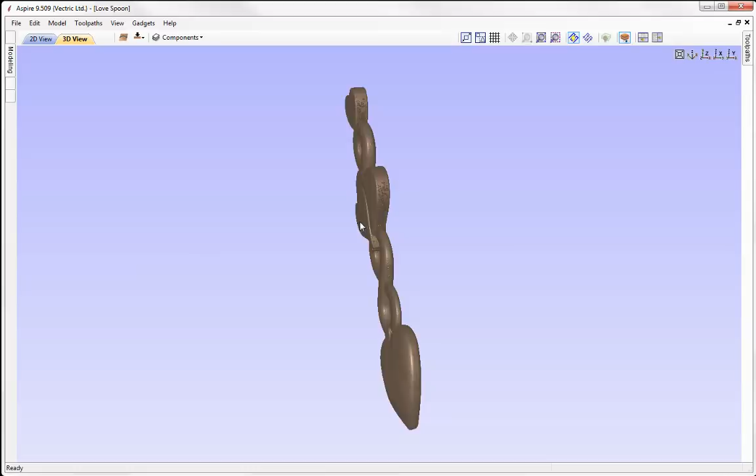In this tutorial, I'm going to show you how to create the vectors, model and toolpath this pretty love spoon. The love spoon is a really nice gift to give to someone, whether that be for Valentine's Day, anniversaries, or as wedding gifts. The idea is that these are actually wall hanging decorations. I'm also going to show you how you can personalize them by applying some V-carved text to either side of the spoon, just to give it that more of a personalized touch.

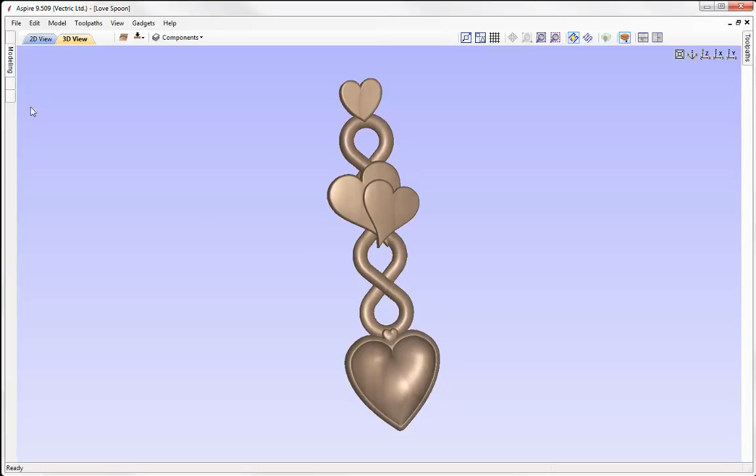Let's go to File, Close, and select to create a new file. Here we need to specify our job type. As we're creating a two-sided part, we're going to use the double-sided job type. I need to put in a width, so I'm going to go with 3.5 inches for the width and a height of 13 inches, and the material thickness that I'm working with is very precise here, it's 0.94.

I'm going to set my Z0 position off the material surface for the top side, and then for the bottom side I'd like to zero off the same face, so I'm going to set the second side to be off the machine bed. XY position, lower left, flip direction, I'm going to flip that from left to right, and then the modelling resolution, I want to work with a very high modelling resolution there, and then we could go ahead and press OK.

So the first thing that we're going to do is draw the heart bowl shape part of the spoon. For this I'm going to switch on the Smart Snap option. That will help me draw my heart shape, as it will enable me to snap to various points within my job. Now I'm only going to draw one half of the heart because I want to make it symmetrical, so to make my life easier I'm just going to worry about one half.

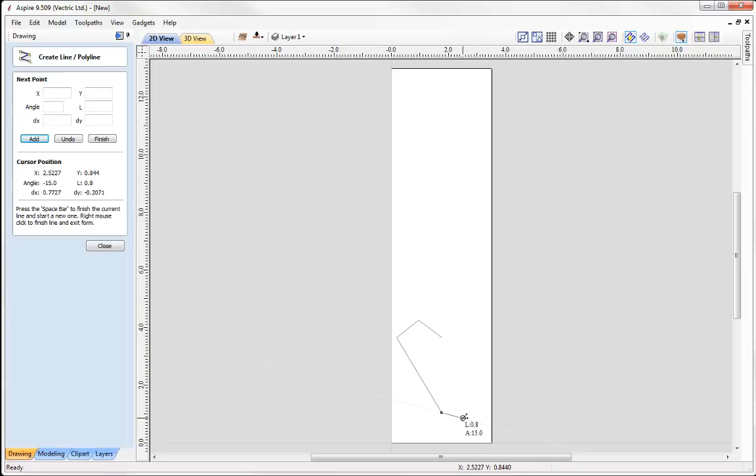Once I've got that perfect, then I can then mirror it over to the right hand side and join the two vectors together. So let's go ahead and use the polyline tool. I'm going to snap to the centre line that runs through here, click to begin my point, and then come up somewhere around here, click to enter that point. Then I'd like to make my next point in line horizontally with our first original point, and go somewhere around here, click to enter that in, and then basically snap back to our centre line somewhere around here, click to enter that in, right click to come out of the polyline tool, and there is the left side of my heart.

So now we need to basically smooth those corners. To do that, we're going to put that into node edit mode. I'm just going to right click over this node here and say smooth point, right click over this node here and also use the option to smooth the point. Zooming in with the scroller of my mouse, I'm just going to adjust the handles on our nodes to really transform the shape of our curve.

So for this handle here, I'm just going to line that up vertically like so, and just drop that down a little. This node here, I'm just going to bring that in, and then take that handle and just using my up arrow key, send that up. And this one here, I'm just going to bring that round. I'm going to take that node and maybe bring that down. Really all this is about is just tweaking with the handles until you're happy with the curvature that you have.

Okay, so I quite like what we've got there, so I'm going to put that in normal selection mode, and I'm going to take that vector and then we're going to use the mirror option here. We're going to flip about the job center, create a mirrored copy, and we'll flip that horizontal, close that out, shift and select the other side, and then we're just going to join those two vectors using the most common point option here, and so now we have one closed vector. With that vector, what I'd like to do is create an offset going outwards.

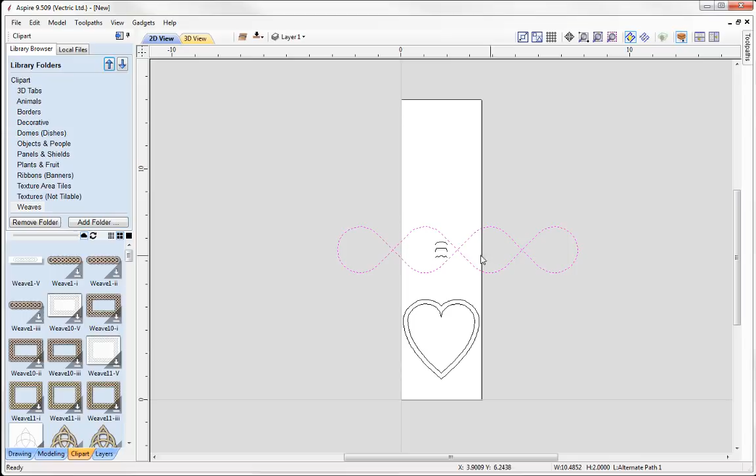Okay, now in this case I don't want these ones, I don't want this one, and I'm just going to go and find the weave that I'm after. Okay, it's not this one. Okay, that's the one that I want. So it's this weave that I want, and we're just going to delete these cross sections. I'm only interested in this one here. I'm just going to move that out the way for now, and we'll come back to this shortly.

So with this weave, I'd like to rotate it 90 degrees. So I'm going to use the shortcut key 9 on the keyboard, and that will rotate anything in increments of 45 degrees. I'm going to press F9 to snap that to the centre.

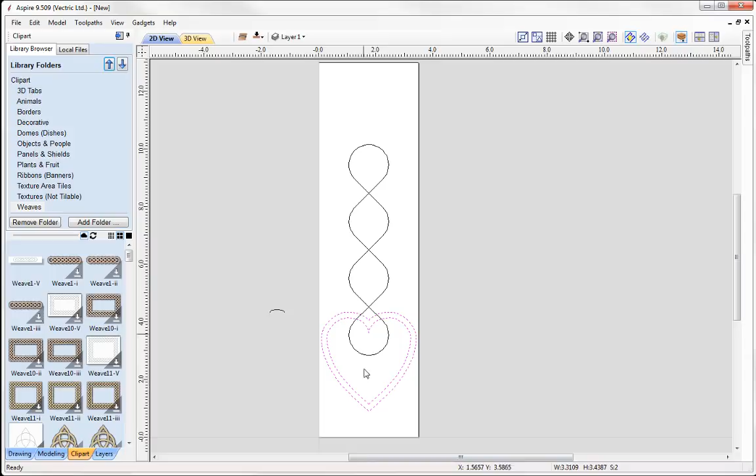Then what I'm going to do is just shrink it down a little. So putting it into transform mode by selecting it again, hold down Shift on one of the corners and then simply drag that down. I'm just going to select the heart vectors and move them down my job. They didn't need to be that high. Okay, and then I can take that weave and look at bringing that up like so.

Right then, so I think I like the position of the weave, how we've got it here. So now let's take a look at this cross section. Let's just zoom in a little. Okay, so you can see our cross section here. What I'd like to do is just increase the height of the cross section.

So let's go into the drawing tab, into node edit, and what I'm going to do here is take the bottom nodes like so, and just using the arrow keys, drop those down a little. And then I'd like to take the top nodes up here and just bring that in, to make this a little bit more rounded. And then we'll introduce the handles on the sides there and just nudge those up also.

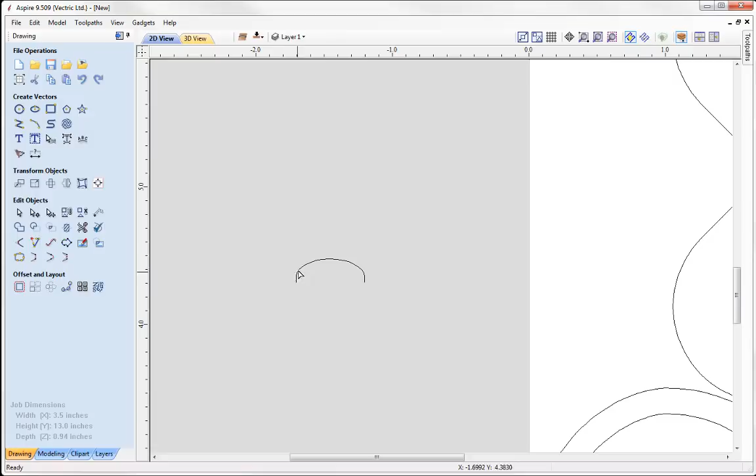Okay, so I think that's okay. It's going to give us a nice rounded part when we come to extrude this cross section around this weave vector, and it will all make sense when we come to actually model the part.

So now I'm going to add in one more vector to really complete the vector side of this modelling project. Going over to the clip art tab, I'm going to go into the 2D vectors folder.

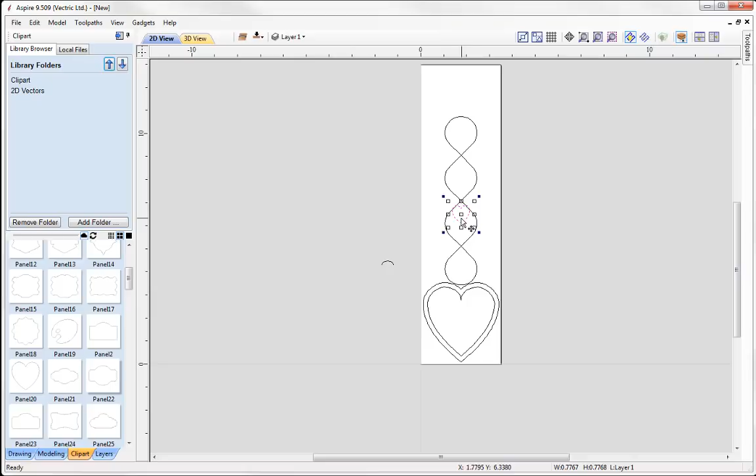You can see I have a series of vectors that I can make use of. And here we have a heart panel 20, and if I just double click to bring that in, you can see we've got the heart here, and then basically I'm just going to go and scale this down. So I'm going to take that, Shift, scale it right down, and then I'm just going to keep that in the center. I'm just going to bring that down following that center line and kind of position that in place

like so. Now if I just zoom in, I'm going to take the weave and I'm actually just going to move it up a little bit. I might move the whole thing up actually, so I'll just bring that up a notch, and then I'm going to take that heart and I just want to make that a little bit smaller. So this is basically just going to sit in between the weave and the heart itself.

Okay, so something like this, and this is going to add just a little bit of extra detail to the spoon. Okie dokie. Right then, so if we press F to fit that to the screen, we can see we've pretty much got all of the vectors that we need. Now there is one change that I would like to make here, and that's to the outer heart shape that we've got. You can see I've got quite a point at the bottom,

and I really want to make that rounded, so I'm actually going to delete that offset, take the original heart, go back into the offset tool, but this time I'm going to untick the create sharp offset corners option. That should give us a nice rounded bottom, so offset that, and you can see it's done that there for us. It's just going to have a much smoother shape to model from. Okay, so I'm happy with that.

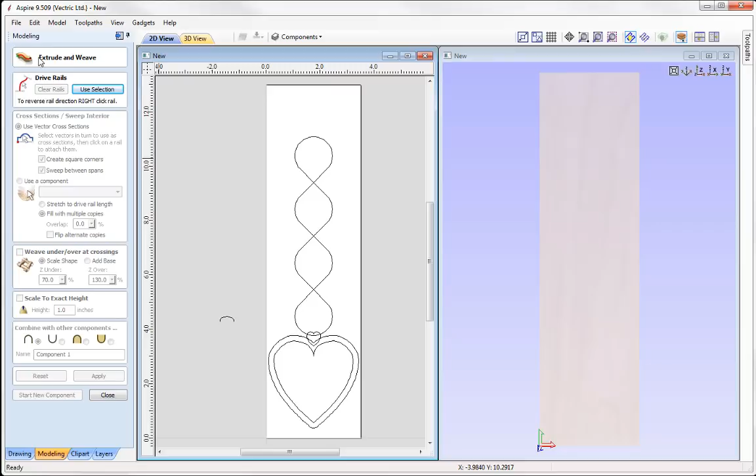So we're going to start by modelling in the weave shape for the spoon using this vector here and this vector here. And we're going to look at using this modelling tool, the Extrude Along One or More Centerline Vectors tool, commonly known as Extrude and Weave. Now this tool allows us to select a drive rail, which in this case will be this vector, where we can then extrude a cross section along the centre line of the vector that represents the rail.

And the nice thing about this tool is that where we have intersections, we can specify how we want the cross section to weave over and under by either scaling the cross section or adding a base height to the cross section. And then we can create a component that looks as though it's going under and over itself to create the weave effect. So let's select our vector for the rail, and then we'll use this option here, Use Selection.

Now we need to select our cross section, which is this vector here. So working our way down the form, we're just going to untick the Create Square Corners, and then going down we want to make sure we select this Weave Under and Over at Crossing section. So this is where we determine how we're going to weave into those intersections.

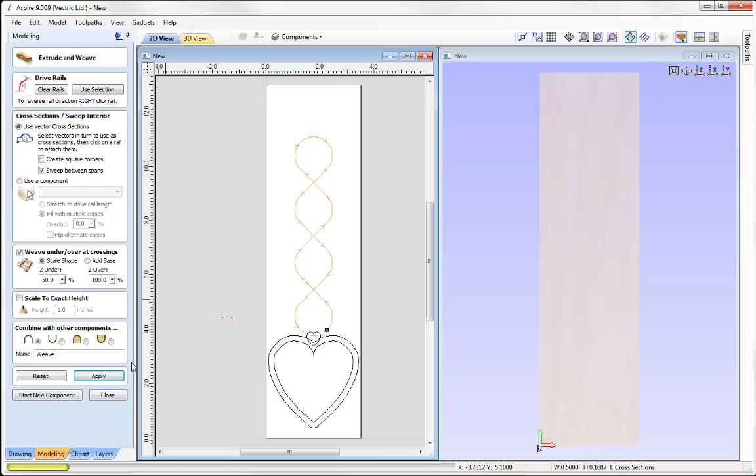Now in this case what I'd like to do is just scale the shape. Okay, so we're going to scale the shape 50% under and then 100% over. And then we could simply give that a name. We're just going to call this one simply Weave. Press Apply, and we can see that there.

So we can see how it's going under, over, under, and then back on itself. So it's a really nice tool to use to create something that looks rather complex. So put that back in Z, and then we'll just simply close out of the Extrude and Weave tool.

So now I want to look at modelling in the larger heart shape. So we're going to select that, and to do that we're going to use the Create Shape tool. Here we want to make that a curved profile. I'm going to give that an angle of 90 degrees. And in this case, what I would like to do is apply a base height here. So just going to add a little bit of a vertical height of 0.1.

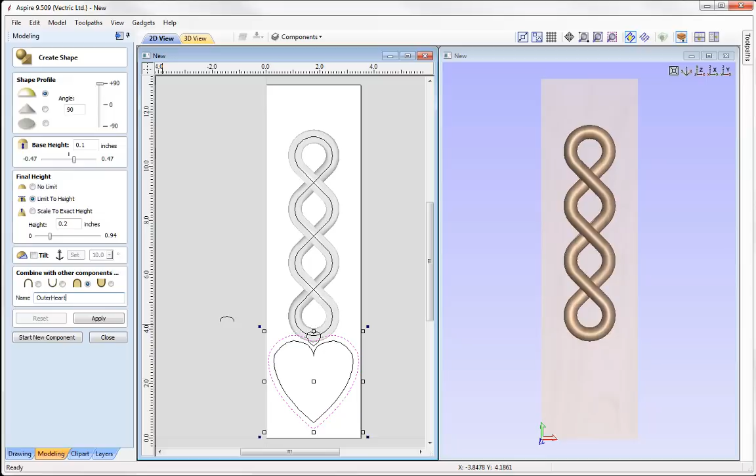I'd like to limit the height of this, and we're going to limit that to 0.2. We're going to set the combine mode of that to merge so that it blends in with our weave shape. Give that a name. We're just going to call this one outer heart, like so, and then simply press apply to see how that looks.

Okay, perfect. So you can see we've got a nice rounded edge that flattens off at the 0.3 because we've set the limit height here to 0.2. But remember, we have that base height of 0.1, which gives it a total height of 0.3. Perfect. So now what we can do is we can use this option over here to start a new component, and we can look at creating the shape for the inner heart.

So I'm going to select that vector, and this time we want to make a recessed shape within that heart. So with that vector, we're going to go with a round profile, again 90 degrees. This time we are not going to have a base height, and I'd like to scale this to an exact height. So let's just use the slider to see how a part will look. Now at the moment it's currently set to merge, so I'm going to switch that and change that to subtract so you can see how that part will look.

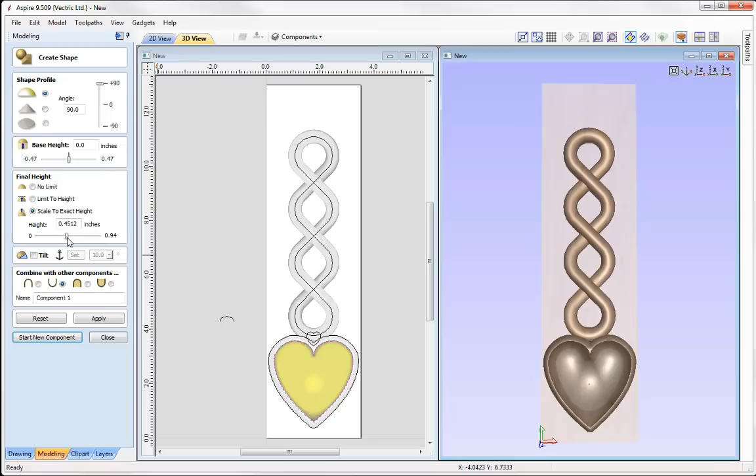Okay, so I'm just going to increase that, bring that down. Maybe just be exact here and just put in 0.4 to see how that looks. Press spacebar to enter that in, and I kind of like what we've got there, so we'll leave that as it is, and then give that a name. So we'll call this one inner heart, and then we'll press apply, and then we'll just go ahead and start a new component. And then we're going to look at this mini heart here.

So this vector over here basically serves two purposes. It's there to provide more decoration, and also just to give it more strength to this area of our spoon here. So with that vector selected, let's go into our create shape form. So we're going to go with a round profile of 90 degrees. Now I know that I'm going to need some base height to really lift that up here, so we'll come back to that shortly. We'll just see what it looks like when we come to apply various heights.

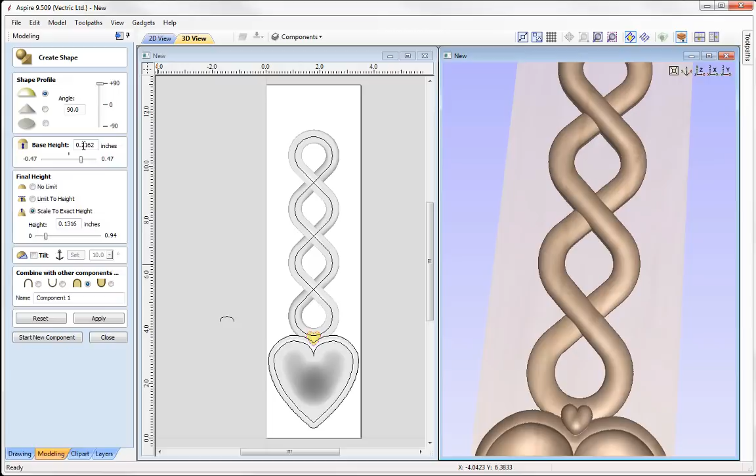So here we're just going to go with 0.4. Let's just press apply to see how it looks. Merge to add that in. Okay, so that's quite a lot of vertical height going in the centre there, so I need to really just bring that right down just to flatten it out. So at this stage I could do with adding in some base height here, so let's just bring that out. Okay, I might just want to round that up to 1/4 of an inch. Okay, so that heart's pretty much out there, but the shape itself I feel could do with flattening off.

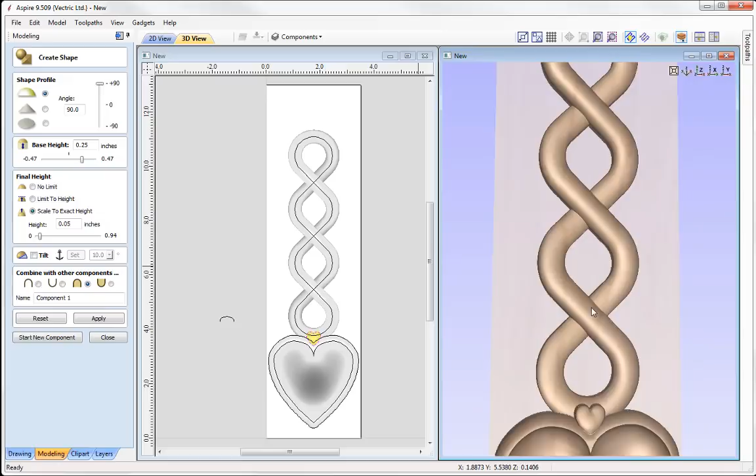So let's just go to scale to an exact height, and we'll just go say 0.05. Okay, so it's got a nice flat shape there, and that looks okay. Perfect. So we'll put that in Z, and then we'll give that a name, and we're just going to call this one mini heart, and then we could go ahead, press apply, close out, and we're pretty much done with the vectors that we've got there.

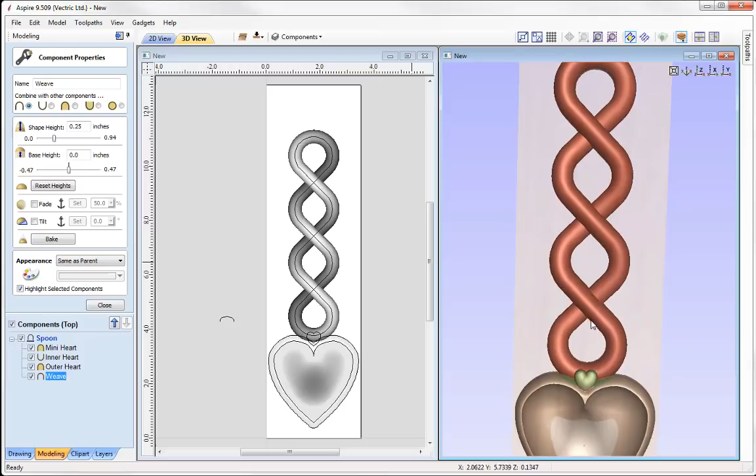So one thing that I'd like to do is just increase the shape height of our weave. So I'm going to select that component, we're going to go into the properties. I'm just going to take this up to 1/4 of an inch. Press space to enter that in, and you can see it's really bulked that out, but we still have retained the actual weave intersections there. Okay, so that's much better. I think we've got more thickness to that, so that's perfect. Right then, we'll put it in Z, and then we'll just close out here.

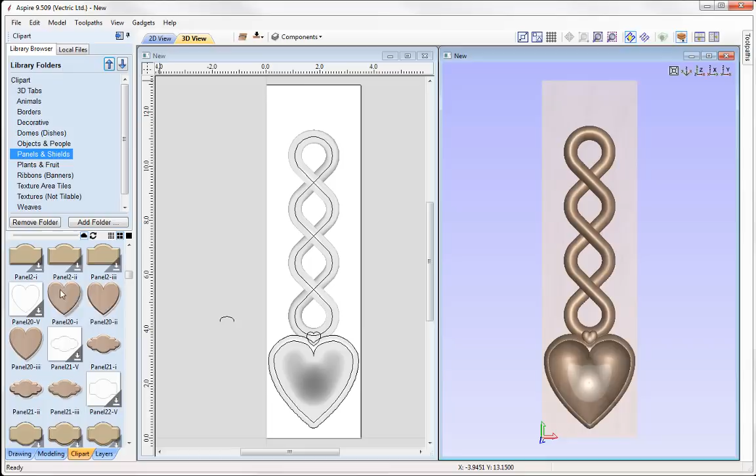So now what we're going to do is we're going to look at adding decoration to the spoon by making use of some of the free clip art that we have. So let's head over to the clip art tab. So in the clip art folder, I know that within the panels and shields section I have a panel that is a heart shape. So we've got 3 different shapes there, and they all have different borders. So I want to take the rounded border. I'm just going to double click to bring that into our job.

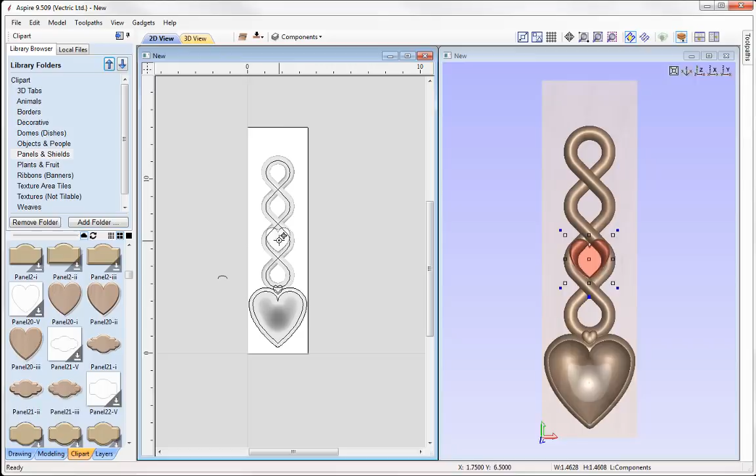And then whilst it's in transform mode, I'm going to take one of those handles, hold down shift to scale that down in proportion, and just roughly put that in place like so. So bring that down, and then I'm just going to shift that up somewhere up the top here, and maybe bring that over just like this.

So I can see in the 3D view that it's currently adding on top of our weave part of the model. So I'm just going to go and select this blue square that you can see here, and that will open up a mini properties form where I can make edits to the component whilst in the 3D view. So here we're going to set the combine mode of that to merge, and then I'm going to apply a base height here of 0.2 just to raise that up in front of our weave. Okay, so that's perfect, it's not too much, it just sits over the weave there. So I'll put that back in Z, and then we'll simply close out there.

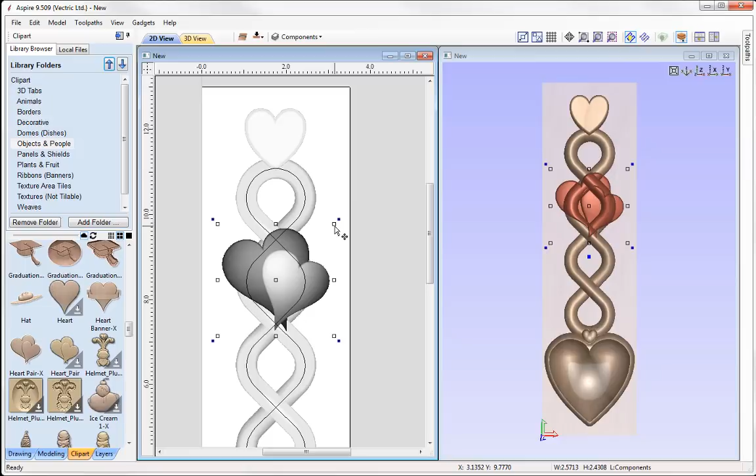And now I'm going to look at adding in one more piece of clip art to go somewhere in the centre of the weave. So here we're going to go to Objects and People, and I'm just going to scroll my way down the list until I find something that is fairly suitable. For example, this here. So I'm going to double click to bring that in. And then I'm just going to roughly scale that down, holding shift to keep that in line. And then I'm just going to position that around the top here, so somewhere like this. I might want to make that a little bit bigger, and then just bring that down like so.

And we can see it's kind of hard to see what's going on here because it's currently adding on top of the weave. So again, if we select this blue square, just move that menu out the way, set the combine mode there to merge, and then we'll look at increasing the base height to lift that up in front of the weave. So let's just go with 0.2 and space to enter that in. That doesn't look too bad. So if we just zoom in on the 3D view and then just take that component, just nudge it down ever so slightly.

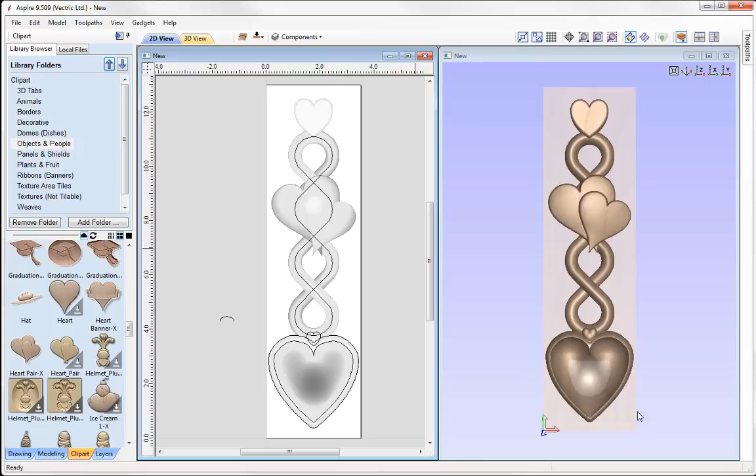Okay, so I think that's okay. Let's take a look at that from the side. Perfect. Right then, so we'll put that in Z, close that form down. In the 2D view, we'll press F just to fit that to our screen, and I'm pretty happy with the top part of the model that we've got there. And so just to finish, what I would like to do is to smooth out the heart bowl components here so that it isn't so sharp.

Okay, so you can see we've got quite a sharp edge here. So to do that, I'm going to go into my modelling tab, and I'm going to take the outer heart, shift and select the inner heart, and I'm going to group them. Okay, with them grouped, I'm going to duplicate them, and I'm just going to switch the original group off. That way I have a safe copy, and then you can also take a look at that if you wanted to take a look at some of the settings for the group itself.

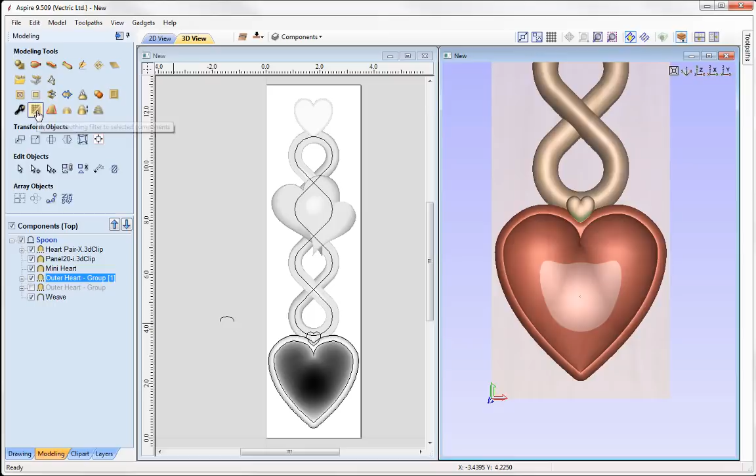So I'm just going to change a copy that we've just created here. And to smooth it, I'm just going to take that and simply use the smooth filter. It's going to warn me that it needs to be baked in order for us to process this. That's okay. I have my safe group available underneath. And here we're just going to apply a maximum smooth, and you can see there the change that happened.

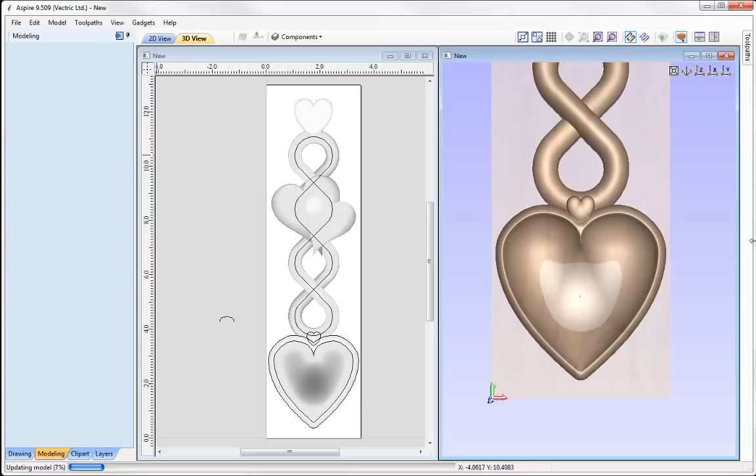If you missed it, I'm just going to go back to minimum, so that's how it was before, it's kind of sharp, and then I can maximize it, and you can see it's just really softened that spoon up. So I'm going to go ahead and press OK. We'll put that in Z, and we are pretty much done with this side. So now what we can do is look at modelling the bottom side.

So this is pretty easy because we can pretty much copy the majority of what we've created over, apart from the bowl part of the spoon, as we would need to model that because we aren't going to use the same shape. But I am going to look at copying the outer heart vector in order for us to use to create that model. So I'm going to take that vector, I'm going to right click and use the option here to copy to the other side. Then I'm going to go and select all of the components that I need.

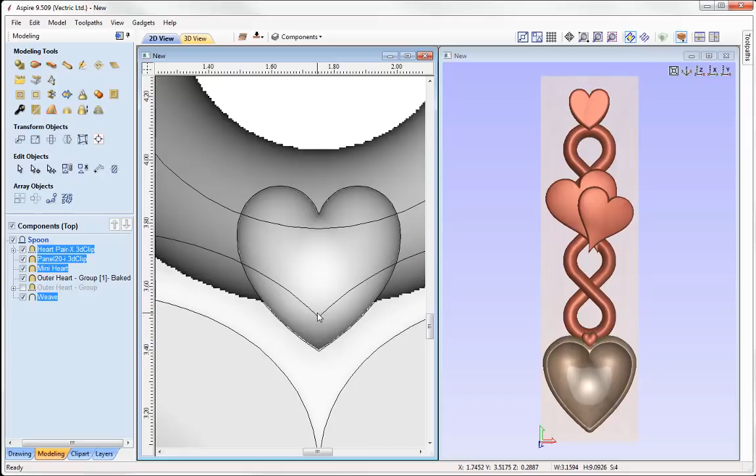So if we just zoom in onto the mini heart there, and then we're going to right click and use the option to copy to the other side. And that will send everything that I had selected to the other side. We switch over, we can see what our part looks like here. So, as I like to keep everything organised, I'm going to rename level 1, we're going to call this one spoon, and then we could look at modelling the back part of the heart bowl.

So we're going to take that heart shape, and then we're just going to go into the create shape tool, and again we're just going to specify certain dimensions in here. So we're going to go with a curved profile, 90 degrees. We're not going to have a base height in this case. I'm just going to scale that to an exact height. Let's apply it to see how it looks so far.

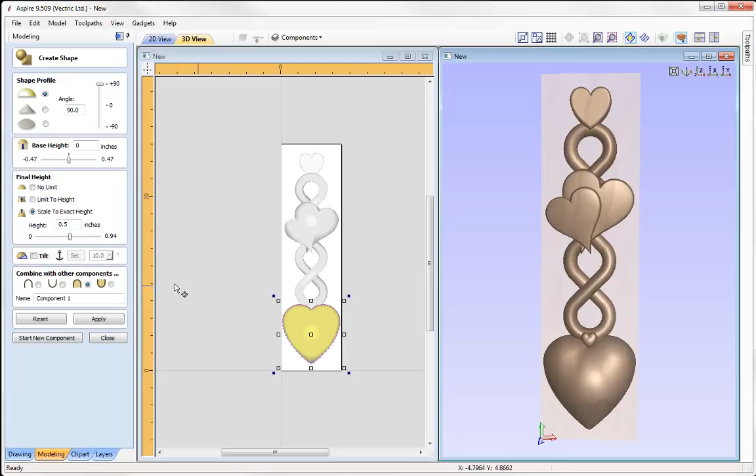Okay, let's set the combine mode of that to merge, and then let's just increase the height there. So we're kind of looking at it like this. Perfect. I might just round that up to 0.5 in this instance. Spacebar to apply that change, and I'm happy with what we've got there. So then I can give that a name. We're just going to call this one heart, and then apply that, and then we can just simply close out, and then we've got our finished model together.

Perfect. Okay then, so now what I'd like to do is just add in some finishing touches. So I would like to look at V-carving in some text to the spoon to add some personalisation. So I'd like to apply something to this heart. So this is like creating a message on the back of the heart. So as this would be traditionally given as a gift, I feel like it would be nice to really customise this part. So we're going to go and apply some text.

So let's go into the drawing tab, and we're going to use the draw text tool. Okay, so I can see straight away where my text is going to be positioned. I can see the size of it, that's far too big here, so I'm just going to alter that.

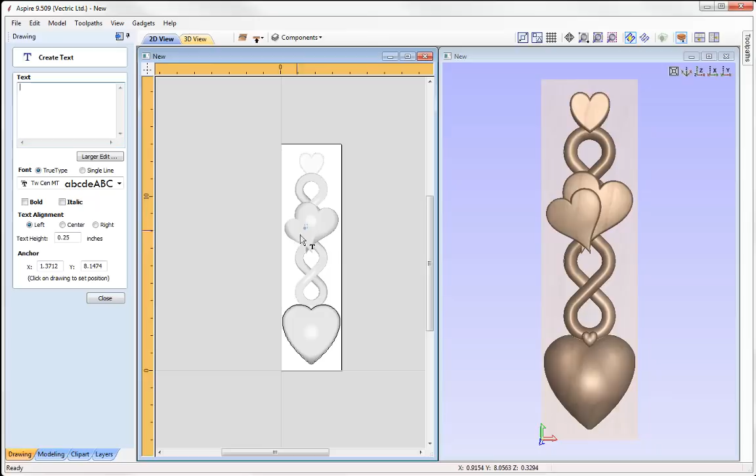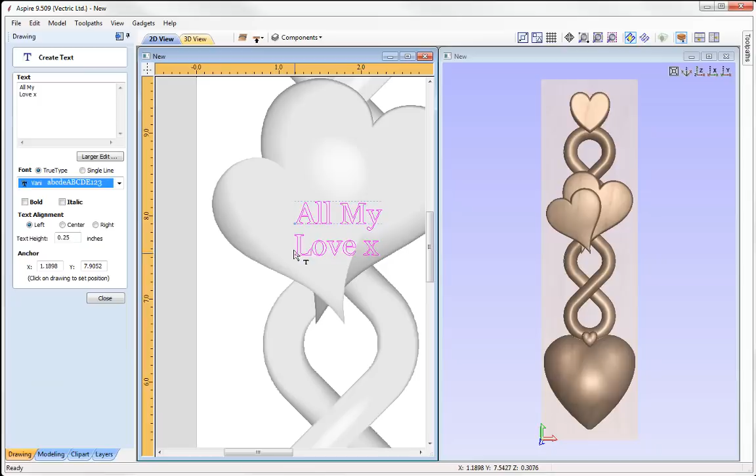I'm going to go with, say, 1/4 of an inch in there, and I'm going to click to position that in this heart here, so maybe somewhere in the centre there, and then I'm just simply going to type in "all my love". Okay, here I want to change the font, so I'm going to have a look through my list, take a look at Vani. I like the look of that, and then I'm simply just going to go and press close.

Okay, so with that I'm going to take it, move it over here, and then just rotate it ever so slightly, and then check that against the actual heart itself, like so. Perfect, so that's the bottom side. So let's switch back to the top side, and then here I want to add in some personalisation to the top heart. So again, text, we can see where it's positioned.

I want to position it somewhere in the centre of this heart, except this time what I'd like to do is make the text a little bit bigger, so I'm going to change that to 3/4 of an inch so I can see what that looks like. That's good. And here I'm going to apply a number. So this is intended as an anniversary gift, so I'm going to put in a 50-year anniversary. So I'm going to put in 50 for the text there, close out.

I'm just going to zoom in, and I'm going to take that heart, right click, and go to the object properties. I'm just going to alter the fade, make that 0% so I can see how this is positioned against the heart a little bit more easily. So rotate that, and then just nudge it over to the right, down again, and maybe rotate it a little bit more, and I think that looks pretty good. Right, and so I'll press F to fit that to our screen, and there we have our personal touches.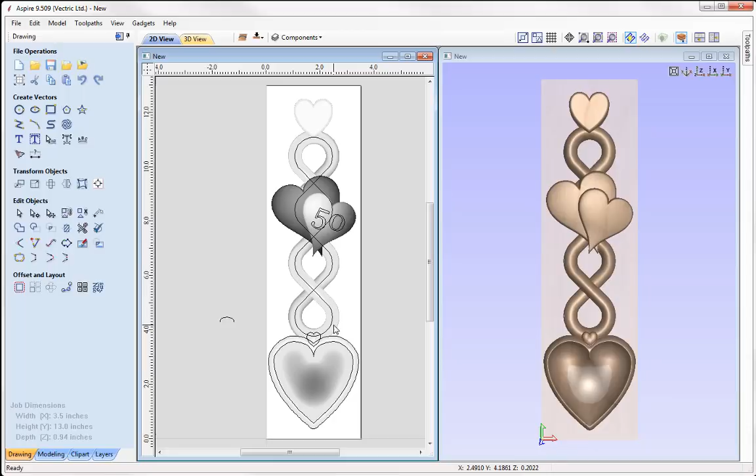So we're going to start by going into our modelling tab, and we're just going to introduce another level here. So we're going to minimise our spoon level, and we're going to insert a new level. We're going to rename that, and we're going to call this one tabs. So we're going to look at adding tabs to begin with. We're going to right click, set the combine mode of that to merge, like so, and then we can go into our clip art tab. We've got this section here called 3D tabs, and then we could look at adding in the tab roughly around there, and then we could just bring that over somewhere like this.

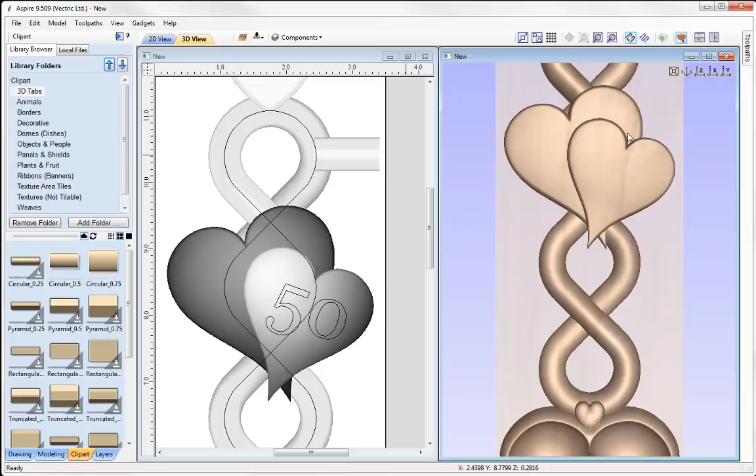I want to alter the shape height here, so we're just going to bring that to 0.0625 in this case, space to apply that, close out, and you can see that's pretty much okay. It's not really cutting into the roundedness of the weave, and obviously we'll be doubling this up by copying the tab over to the other side, so we will have a total tab height or thickness of 1/8 of an inch.

Okay then, so with that we're going to basically copy that tab. So I'm going to take it, hold down Control and just put one in position here, Control, and then move that into position over there. And then Shift and select all of those, and then Control Shift H is the keyboard shortcut to basically mirror and copy items over horizontally. Okay, so there are all my tabs. So that's pretty much it for the tab side of things.

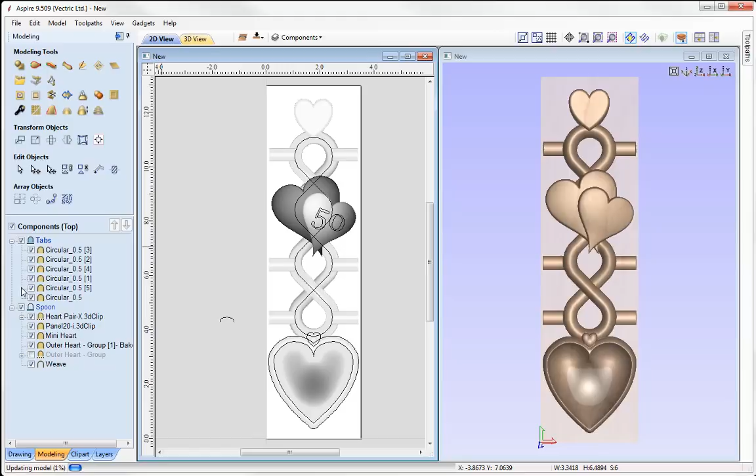So let's go into our modelling tab. And then we're going to select all of those tabs, and we want to copy those over to the other side. So we'll right click, say copy to the other side. That'll send them all over onto the bottom side for us.

So we can switch over, you can see they've been added there. Let's create a new level and rename it 'tabs'. Set the combine mode to merge, and then take those tabs we copied over and put them in that level. So now our spoon will be held soundly in place to our material block.

Now what I want to do is create a plane that specifies where my tool drops to. As it stands, my tool will only reach to 0 when cutting around my part, which would likely leave me with a seam since I'm using a round tool for the finish pass. Creating a plane on one side, the bottom side, with a negative height will bring the tool down, eliminating any seam or cusping around the edge of our spoon.

To do that, we're going to insert a new level, rename it, and call this one 'plane'. Set the combine mode to merge, and add in a 0 plane. Our 0 plane is currently at 0, so we'll go into the properties and drop this to negative 0.1, then enter that in and close out. The idea is that when we come to cut this side, our tool's going to drop to negative 0.1, which will remove any form of cusping because we're essentially cutting into the other side.

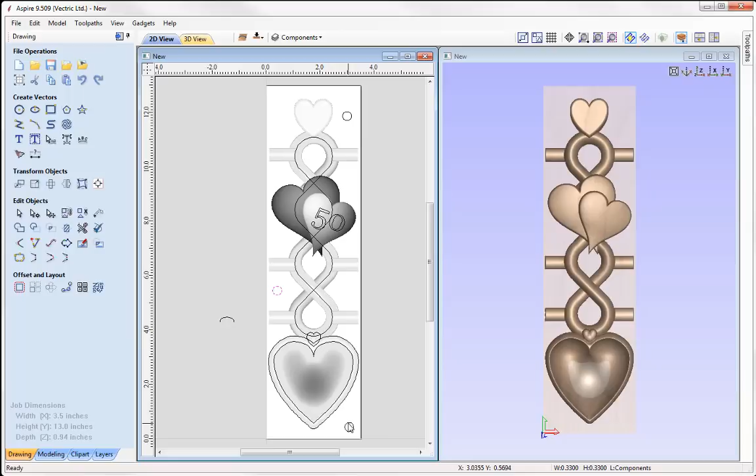If we close that down, with that selected, we're going to shift and select the other circles. I'll use the option here to copy to the other side. So when we switch back over, you can see we've got the vectors of those dowels there.

Now we're ready to create the toolpaths, so let's switch over to the toolpaths tab. The first thing we need to do, as always, is check over our material setup, making sure everything listed here is replicated when we cut this on our machine. Our material thickness is 0.94, XY 0 position is going to be in the lower left hand corner.

We're going to set the Z0 for the top side on the material surface, then position our model within our material. I'm going to put it bang on in the centre, so we've got a tiny gap above and below. Then check over your rapid Z gaps, home start position, and the Z gap above the material, ensuring they're all safe and appropriate for your own setup. So here I'm going to go ahead and press OK.

The first thing we're going to do is look at running the dowel holes into our material. With those three vectors selected, we're going to apply a profile toolpath, cutting down 0.7 into our material using a 1/4 inch end mill, machining on the inside of our vectors. I'm going to use the Show Advanced Toolpath options to bring up some advanced options, and here I'd like to add a ramp to the toolpath where we're going to apply a spiral ramp.

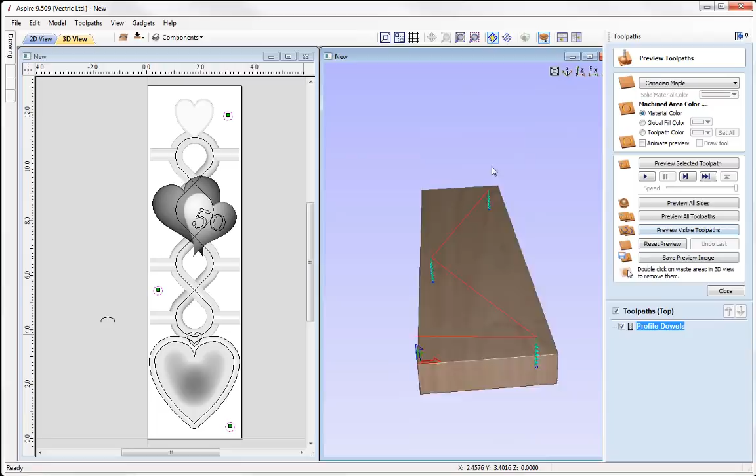So it's going to spiral ramp into that vector, and we're just going to give that a name. We're going to call this one Profile Dowels and then simply press Calculate. Okay, so you can see how that's going to spiral into our part.

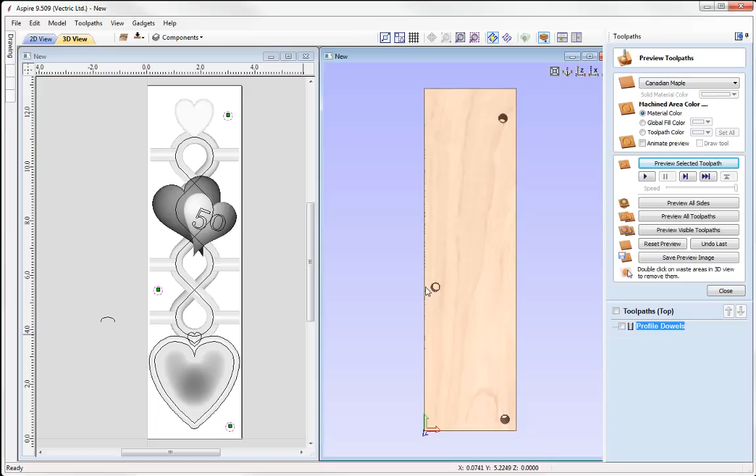Put that in Z and then simply go ahead and preview that. At this stage what I would do in terms of the physical setup is just double check that my dowels actually fit in here, and if they don't then I'll just oversize them until my dowel does fit in place. So let's just assume that our dowels do fit here. So just going to close out.

And now we're ready to run a 3D roughing toolpath to hog out the majority of the material of our spoon. So we're going to go over and use the 3D roughing toolpath. Here we're going to use a 1/4 inch end mill, and now we need to specify our machining limit boundary. In this case I'm going to use this option here to machine by level.

If we just pull out our modelling tab over on the left, we've got a spoon level and we've got a tabs level. So the idea here is I'm going to use the spoon level as our machining limit boundary, and what it does is it takes the components that are within this level and uses that as a 2D boundary. But because we're machining by level, it's still going to include anything in the composite model that is within that 2D boundary, and that will enable me to keep my tabs in place.

And it will do that because I'm going to specify a boundary offset. So first off we're going to say spoon as my level, and then for the boundary offset we're going to go with 1/8 of an inch. It's going to come out past the components within the spoon level by 1/8 of an inch, so we're going to see 1/8 of an inch of that tab in place, and that's going to enable us to hold our spoon together.

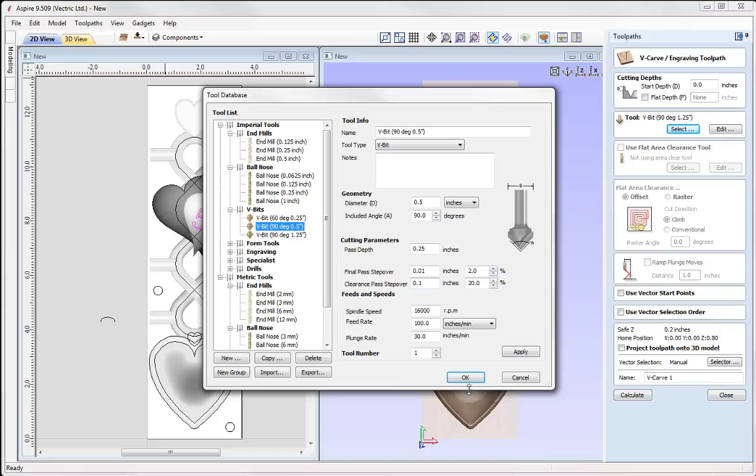And here we're going to specify a tool. If we go to our V-bits, you can see I've got a 90-degree half-inch tool. So I'm going to make use of that, and we'll go ahead and press OK. But what I need to do is make sure that I project the toolpath onto the 3D model, so it's going to basically locate where the model is, and then it will create the V-carving on there.

So just simply call that one V-carve, and then we'll put 50 on the end, and then we'll press calculate here, preview that, and we can see how that's going to look. Okay, so that is our top side complete. So we can close out there.

Now in terms of the physical setup here, now that we're done with the top side, we're going to take our material block off of our machine. Our next operation is we're going to take the dowels of the bottom side, and we're going to machine a profile pass into those dowels directly into our spoil board.

Okay, so we're not having any material here. Now, just one thing we want to do is double check and glance over our settings. This time, remember we are setting Z0 off the machine bed because we're always referencing from the same face. I'm just going to cancel out there, and we're going to select the vectors that represent our dowels into the profile toolpath.

Now because we are setting Z0 off the machine bed, I need to put in a start depth of Z equals my material thickness. It's going to drop down by the material thickness, and then it's going to cut in to a cut depth that we specify, in which case we're just going to go with 0.7 again. Here you just want to make sure that your dowels can fit into the 0.7 in the spoil board, as well as the 0.7 of the dowels that we machined into the top side of the material. So this is really relevant to the size of your dowels.

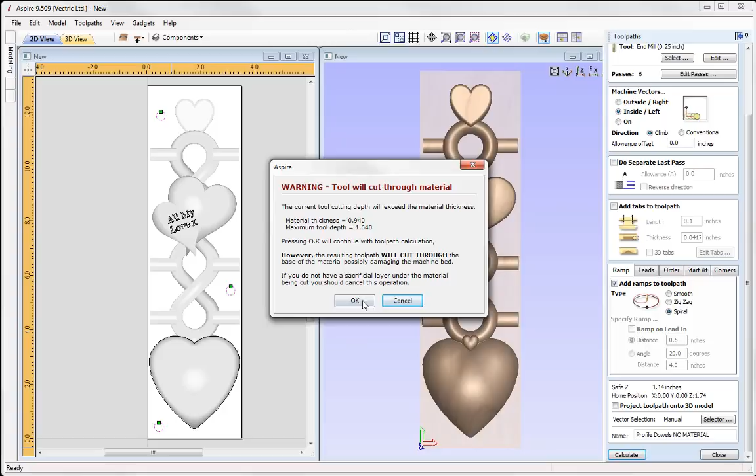Press calculate. It's going to warn us we're going to cut through. That's okay, I intend to cut into my spoil board. So you can see it's going to drop down by a material thickness, and then it's going to spiral into our spoil board. Now I needn't preview this because that's just going to eat into my material block, which is not really what we'd see here. We're only cutting into the spoil board at this stage.

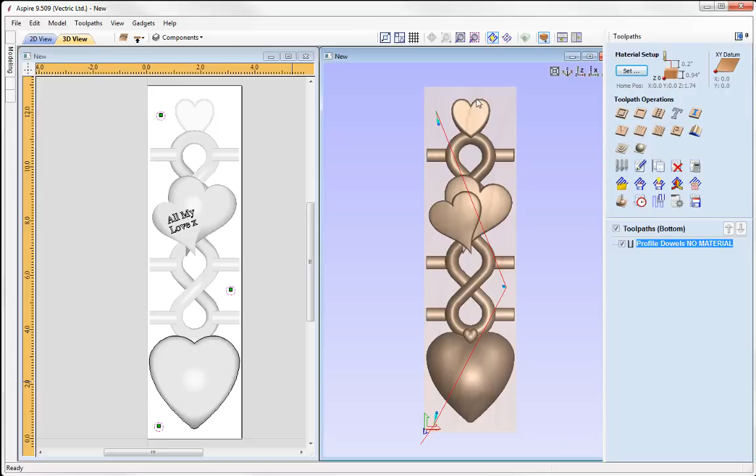So now we can continue to machine the actual spoon itself. Again, we're going to go and apply a 3D roughen toolpath using a 1/4 inch end mill, and again we're going to specify a level, and again we want to specify the spoon level.

And the nice thing about doing this by level is that now we're also including any components in other levels, and in particular for the bottom side, remember we put in that 0 plane, that we changed the height of it to a negative height of 0.1, so that will enable our tool to drop down 0.1 past 0, so that we get rid of any form of cusping or seam.

So make sure we select the spoon as basically our 2D boundary, but it's going to include everything else that we've got within our composite model. Okay, so the same boundary offset, exactly the same settings, so we'll just simply go ahead and press calculate there.

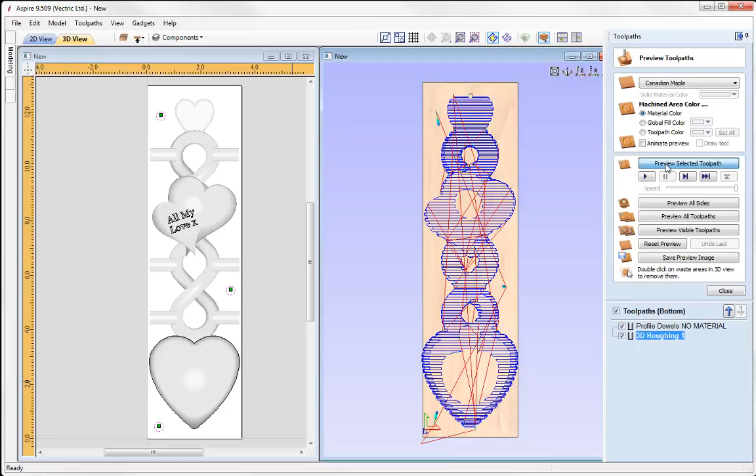And then we could preview that, close out, we'll run a 3D finishing toolpath, again exact same settings that we applied to the top side, press calculate. Like I said before, it's going to take a little bit longer because we are working with a finer tool and much more detail. So the software is going to take a little moment to do that.

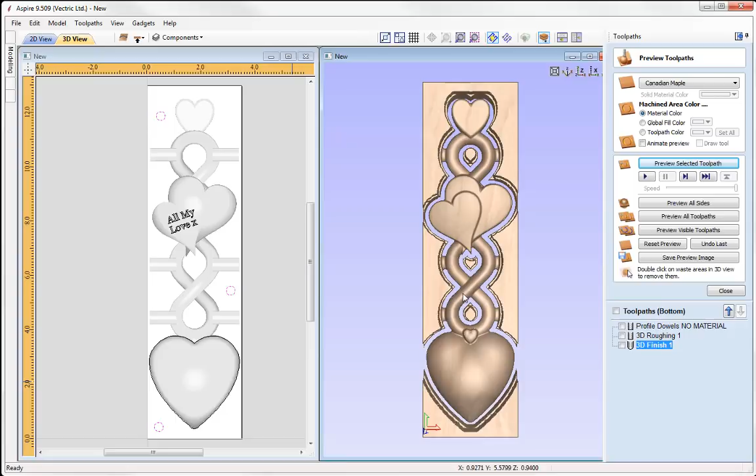Okay, so there we have all the detail there, perfect. So this is what it's looking like so far.

And the final thing that we need to do is just do that V-carve. So we're going to take that text, use the V-carve toolpath, same tool, ensuring that we project that toolpath onto our 3D model. Press calculate, preview that, and that's what our part will look like.

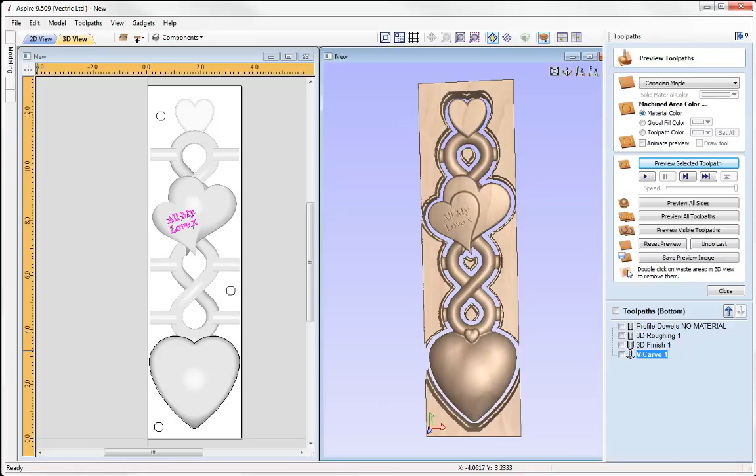And so if we maximise the 3D view and just close out of the preview there, that really completes this example of showing you how to model a two-sided love spoon.

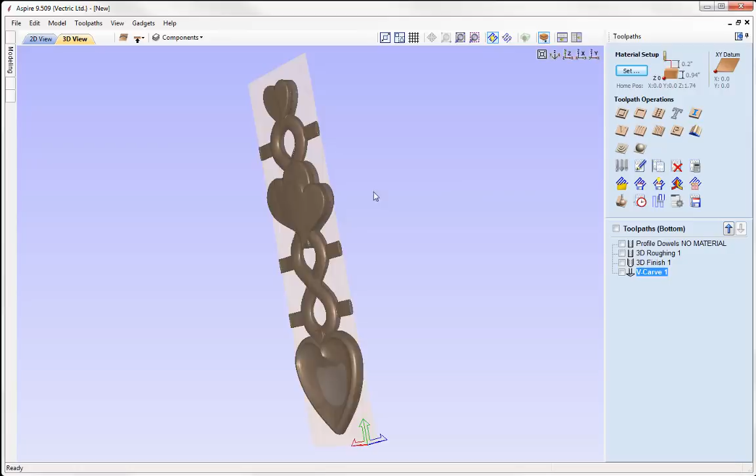And the really nice thing about this is you could use this for all sorts of occasions: Valentine's Day gifts, wedding gifts, anniversary gifts, and it's very interchangeable. All you'd have to do is simply alter the text that you apply to make it more personalized for yourself.

So let's just go ahead and save this file. Go to File, Save As, and we're going to call this one Love Spoon. Press save, and then you can access that from your project folder.